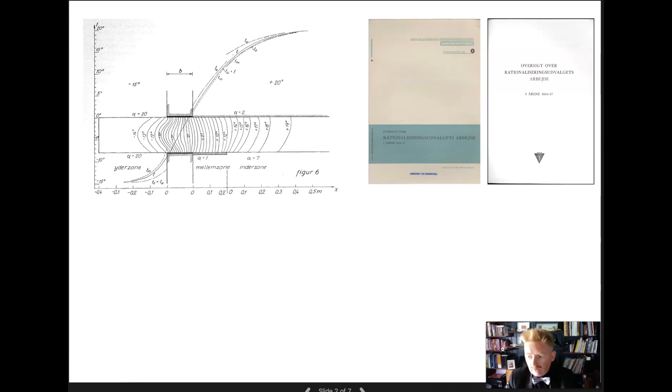They had identified the risk of condensation, particularly with continuous concrete intermediate floor slabs. They also identified that modern, tighter concrete constructions were aggravating the risk of condensation at cold bridges.

The report indicates that there was a working knowledge of cold bridging as part of the Scandinavian construction industry prior to the 1950s. Yet it was probably the language that became a barrier to the broader dissemination of this knowledge around Europe. Prior to the Second World War, human health was a concern of the modernists in particular.

We know that Walter Gropius and Maxwell Fry had been arguing that clean modernist buildings improve the living conditions of the people in their Impington project in 1936 in the UK.

Pierre Winter, a doctor and neighbour of Corbusier's in Paris, gave a lecture at CIAM 5 in 1937, arguing for a close collaboration between doctors and architects to reduce diseases to a strict minimum. So it was an issue at the time.

We also know that Corbusier had understood the importance of aspect and sun path before designing and completing Unité d'Habitation in Marseille in 1952. Many of the young architects in London County Council in 1950 would be heavily influenced by Corbusier's Béton Brut of Unité d'Habitation.

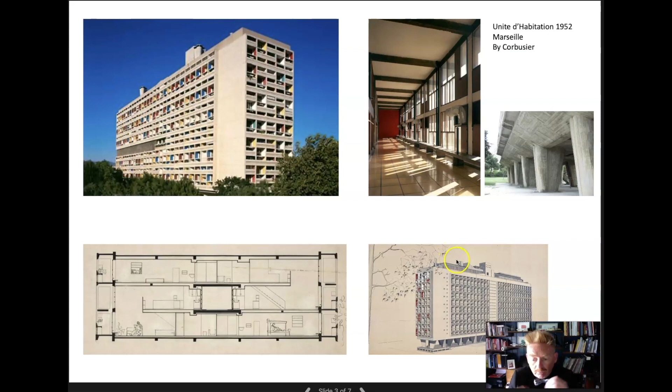In 1953, the LCC London County Council architects completed Winchfield House, which was heavily influenced by Corbusier and Unité d'Habitation. In fact, it was James Stirling, who worked with LCC at the time, who attributed the concept of Winchfield House to Corb's much earlier and conceptual Tower in the Park.

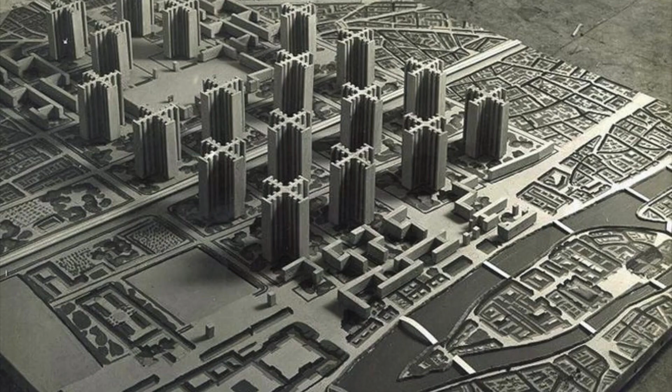Such building designs would not benefit from the understanding of thermal bridging. In fact, it was Marmot in 1978 who argued that Corbusier carried through on a much higher quality in Unité d'Habitation than LCC did in Winchfield House, where they compromised on so many of the key features of Unité d'Habitation which would have benefited the occupiers.

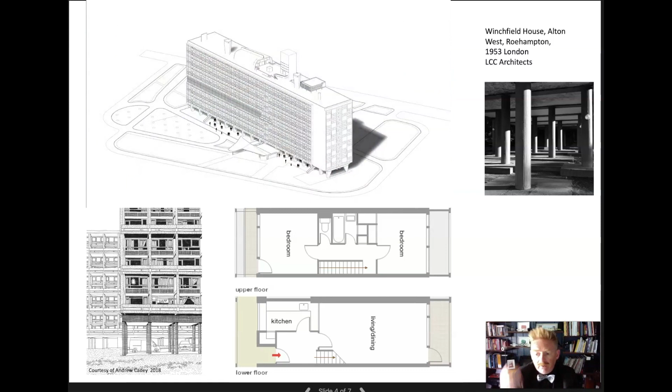Unlike Marseille, London would have a higher risk of condensation with much lower winter temperatures, little in the way of insulation in the buildings.

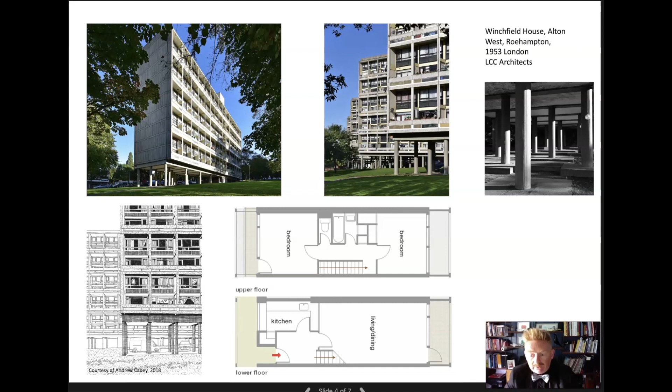So as we moved through the 1950s and 1960s, would British architecture, who were continuing to provide mass housing, learn from these experiences and gain better understanding of the environmental consequences? As early as 1963, Brown and Wilson, writing in the Canadian Building Digest, warned that linear thermal bridges could cause condensation and structural damage, particularly in freeze-thaw conditions, which could be readily overcome with insulation placed over the entire exterior of the building. What a radical idea. They highlighted the impact of lateral heat movement in non-continuous constructions such as timber frame, which were popular in Canada and the US at the time.

So as the consequences of thermal bridging became more mainstream in the 1960s, would architects and developers of housing and apartments change the way they designed and built them?

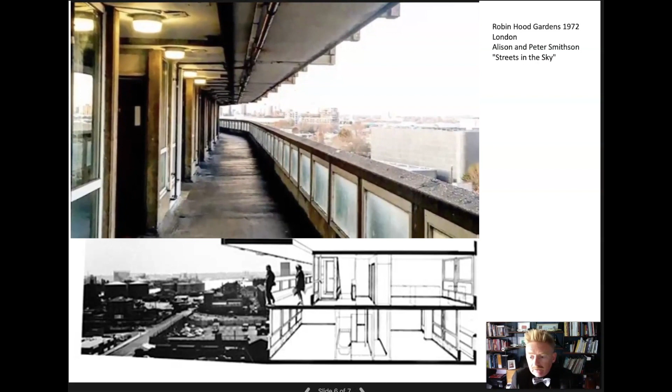Despite the many social and environmental performance failures of the LCC apartment tower buildings through the 1950s and 1960s, Alison and Peter Smithson would complete another homage to Corbusier nearly 20 years after Winchfield House, in 1972, at Robin Hood Gardens. The Smithsons, who we know were environmentally aware — and I would argue there was perhaps an excuse in the 1950s for a lack of knowledge of linear thermal bridging — but was there an excuse in 1972?

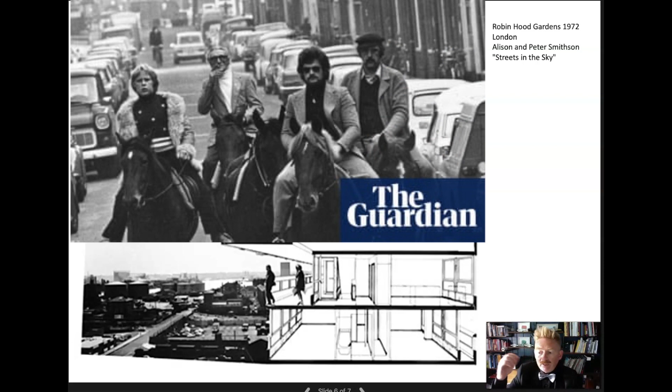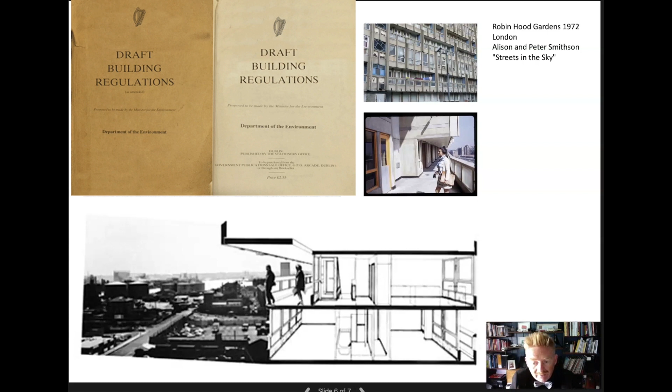Realistically, without insulation and with the use of single glazing, thermal bridging must have seemed of little concern in terms of energy loss. In fact, it would be the oil crises of 1973 and 1979 which would bring governments, policy, standards, developers, architects, building owners and occupiers to a concern for building energy conservation, and only then would issues like thermal bridging start to get a fair hearing.

Although they are all linked — Chernobyl, the Kyoto Protocol — it would be the Energy Performance in Buildings Directive in 2002 that drew our focus into building energy, and we became more concerned about insulation and thereafter thermal bridges in relation to heat loss. So thank you very much for your time today, and I hope this gives you a little bit of historical context to the background of our topic today.

Thanks very much, Mark. That was, as ever for me, fascinating historical context, just like with your columns in the magazine. It's a sickening feeling to realize how much this knowledge has been within our grasp for so long, and it really gives us even less excuse for our failure to act.

Anyway, I'm going to move on to our next speaker now, and I hope all of the attendees are enjoying the Pechakucha, or Pachakacha depending on who you're speaking to, format for these presentations. It's a difficult ask, I know, because when you're dealing with something as technical as thermal bridging you invariably have to go into the realms of PowerPoint. So of course this won't be as seamless as the kind of Pachakacha presentations you'd find of people showing what they've had for dinner — there's more substance hopefully in this, more nutrition actually.

Okay, so this is a thermal bridge, and you can see we've modeled it to look at the heat loss, but that's not what I'm really worried about. I find thermal bridges are actually a symptom of deeper issues. So this is what I'm going to look at here, and I'm talking about new build, not retrofit, which is a different challenge, as you'll hear later.

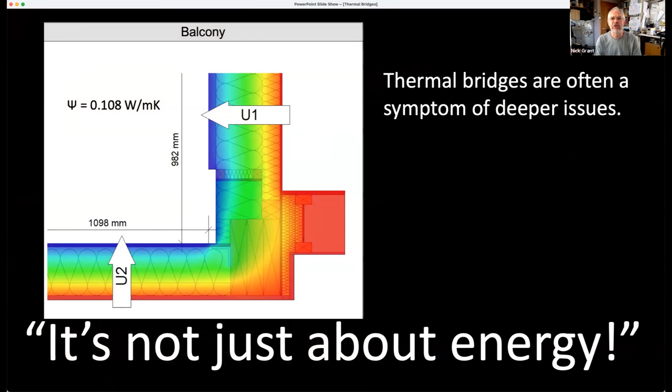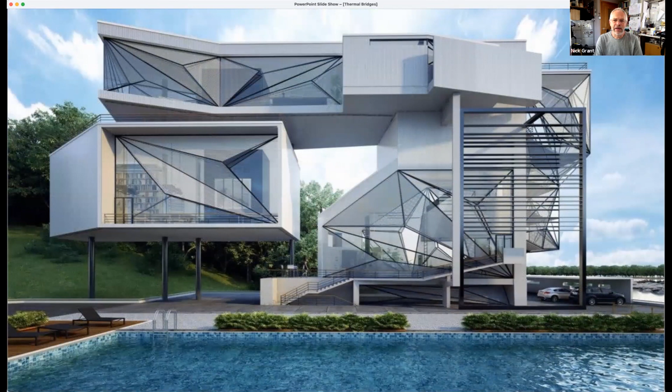You can have some fun Googling cantilevered housing. Extreme architectural expression, clearly lots of challenges here. But is this what we really want to be doing? Are we looking for solutions to this problem?

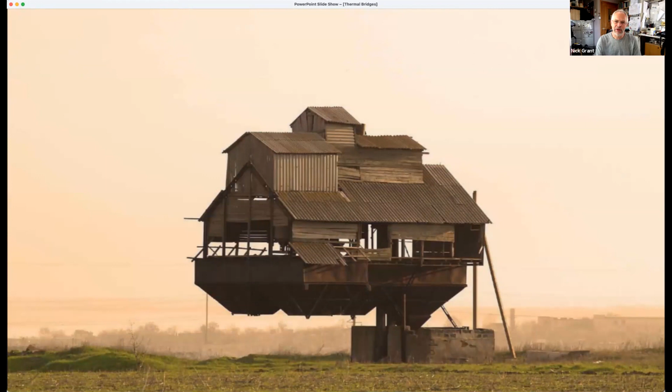This is an interesting example, clearly very interesting, I think it's very beautiful. It's a potato sorting station in Ukraine. Again, no thermal bridges, but it's definitely cantilevered, and it looks structurally challenging. But there's a real rational reason for that layout: if you're going to drive potato lorries underneath it and you don't want any columns to bump into, then this is really a good solution.

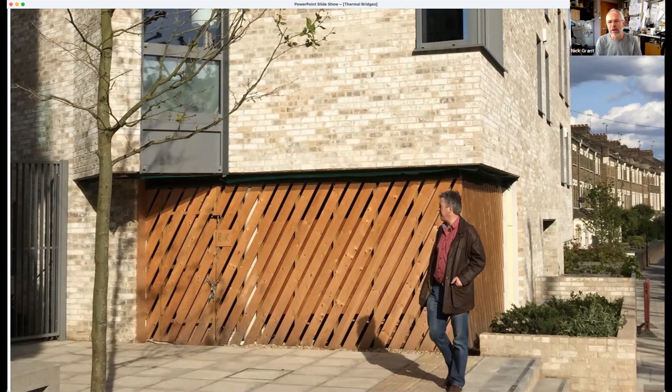So here we've got Camden again. This is a passive house, Chester Balmore, less extreme than that example, but we've still got some fairly challenging structure. We've got the brick starting at first floor in places, corner windows. So how do we hold this brickwork up?

The way we do that, of course, is with hidden steel bracketry, which you can't see here - steel angle sections, we see a few under the soffit here. And these have to be thermally broken because they connect the external brickwork to the inner warm structure. That's expensive, it's difficult. And how do you finish this off underneath? How do you finish the soffit? How do we insulate around these? So lots of technical challenges and things that are quite hard to make look good.

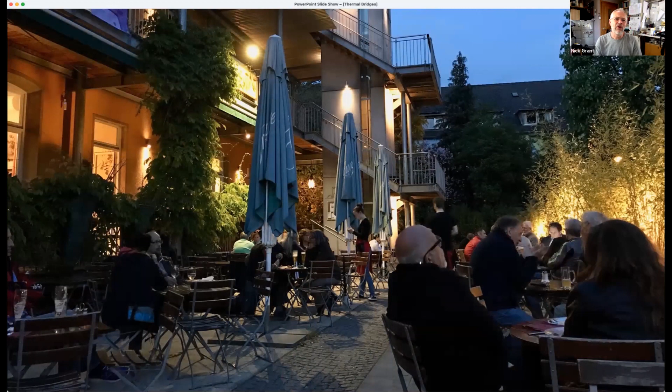In Freiburg, so here we've got - you can hardly see it in the background - there's just these nice balcony details. It's galvanized steel, it's all pretty industrial and pretty basic, but the overall effect is really lovely. We've got nice plantings, there's nice furniture, a really nice vibe in the cafe here. Just the overall effect's very good.

Slightly more complicated again in Freiburg. Here the balconies cantilever out a bit further to give a bit more space and a bit of change in expression, but quite simple to do because it's beyond the thermal envelope again. So although they're cantilevering beyond the posts, this is all outside the envelope, so it's not really that challenging. And again, very generous spaces, looks really nice.

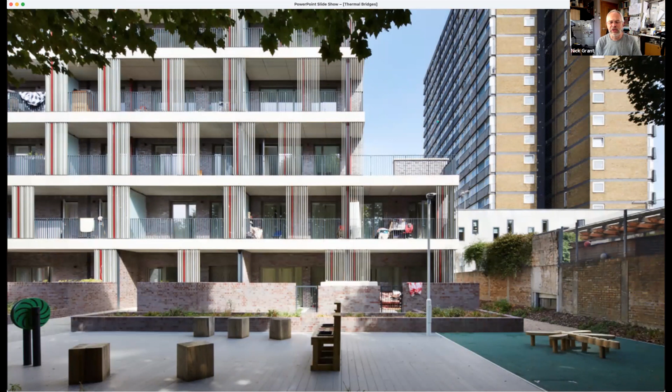Agar Grove in Camden again, so this followed on from Chester Balmore. The balconies here are supported, as in Freiburg, on external structure.

So this could be a development anywhere. This is some housing in Gloucester. Classic thing of lightweight cladding, external insulation, and then fixed back to either masonry or steel structure. And here we can't avoid the thermal bridging. We need something to connect the two together, which goes through the insulation. And the usual solution is aluminium brackets, which hemorrhage heat. And the thermally broken ones are expensive.

Here, Monte Paulsen in Canada has just used stainless steel screws, difficult to prove structurally, so they actually mocked it up and tested it out. So it's a nice simple solution to a challenging problem.

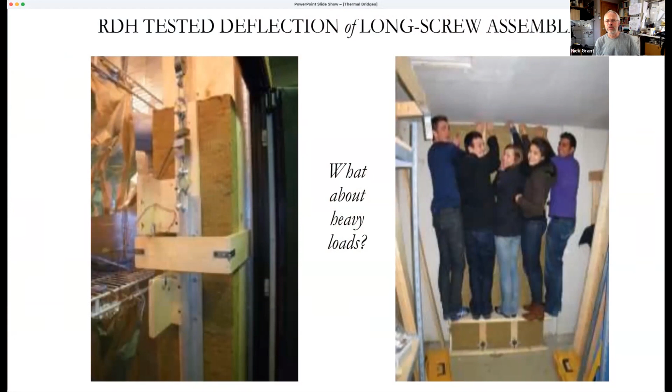So in summary, if possible, design out thermal bridges. Don't create structurally challenging situations like cantilever balconies and so on. Try and design these out because that'll create savings. It'll potentially even look more beautiful. And where it's unavoidable, so where we've got to connect to the ground with foundations, or if we're wanting to hang lightweight facades off the structure, then we do need some thermally broken connectors.

But what we need here is low-cost, simple connectors that everyone can use, not just for passive house projects. We need everything you can get from the builder's merchant to be thermally broken, so we're not wasting energy and creating potential mold and moisture problems, as other speakers will talk about.

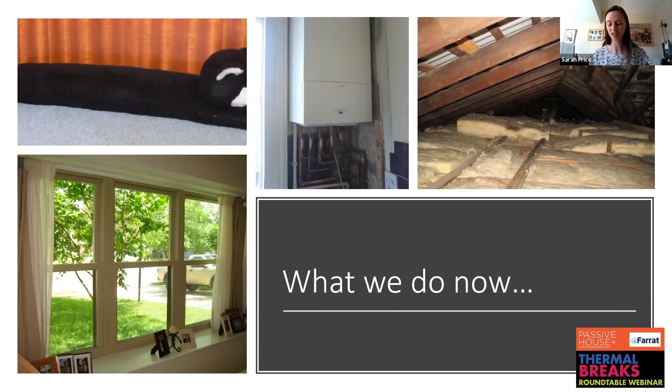So a bit of context, what we do now is we might install loft insulation, a boiler, new windows, but there's no joined up thinking. We do step-by-step retrofits, but there's no design, there's no planning. We don't think about the junctions, the corners and the edges, and we don't think about how the insulation's impacting on heating and ventilation. So we end up with unintended consequences like this one.

And that's not just mold growth. There's loads of unintended consequences like increased energy bills or fire or poor indoor air quality or degradation of the structure. This is just one of them, a lot of them related to moisture.

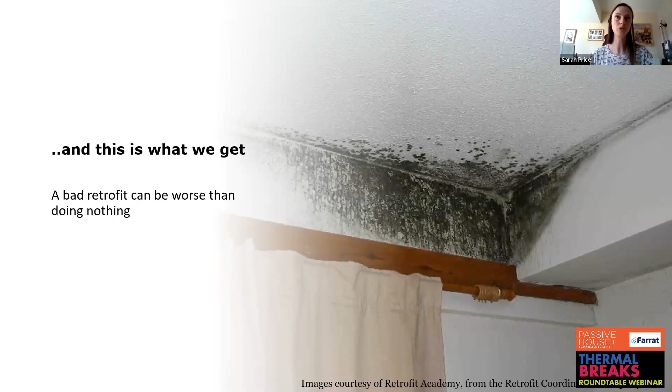Can we have a thermal bridge free retrofit, or is it an oxymoron? Well, if we say thermal bridging is continuous insulation all the way around a building, then no, we can't, but we can mitigate against them. And there's two main issues with thermal bridges: mold growth and heat loss.

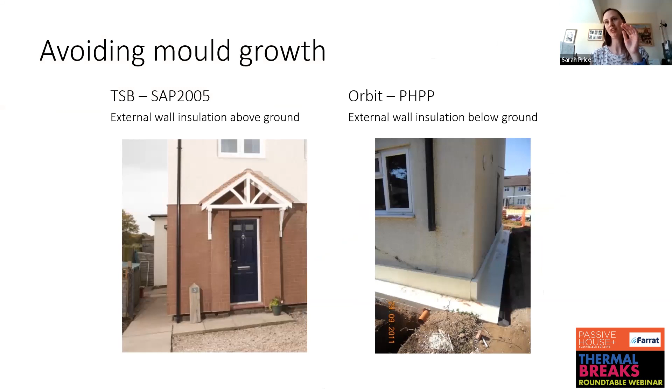So here's an example of external wall insulation. On the left-hand side, we've got the external wall insulation finishing just above the ground level. So both these properties have got solid floors in them. On the right-hand side, this is an Enhabit one, and we've got external wall insulation extending down below ground level. So it's just the foundation that's in there.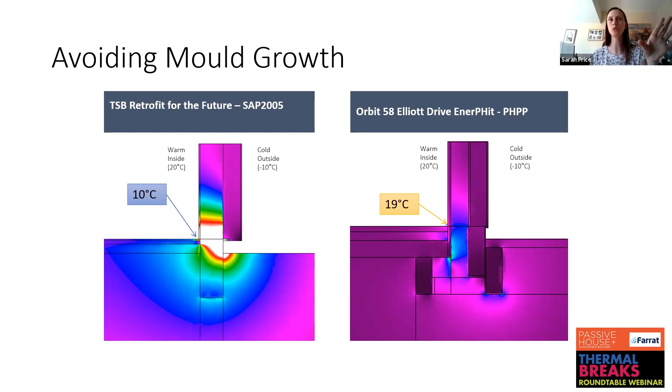And then these are building physics models of those thermal bridges. And we can see the internal surface temperature that might occur at different internal and external temperatures. And you can see the one where the insulation doesn't come down as far on the left is a much colder internal surface temperature than the one on the right.

But I've got thermal bridges. We've all got thermal bridges, and some are fine, like my wall to floor junction, and some are not fine. Some are mouldy, like in my bay window here. So I've got nice black mold growth that I have to clean off every year. So why is that? It's not as straightforward as if you've got a thermal bridge, you get mold growth. We need to manage the risks.

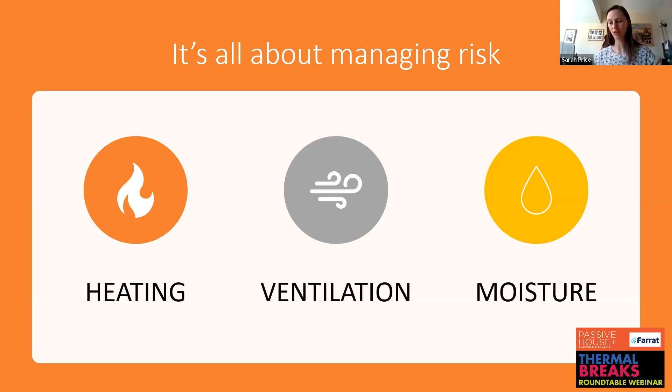So we need to make sure that the space is heated well. We need to make sure that it's ventilated well and into the corners. That's the really difficult bit. We've got to try and control moisture. So through cooking, washing, bathing, we've got to make sure that we remove that excess moisture from the home.

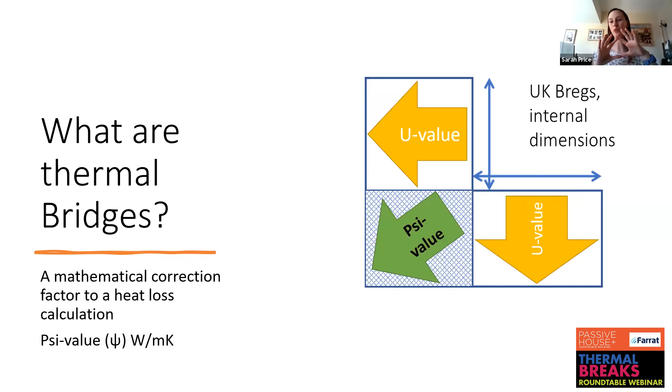There's another definition of thermal bridges, not just continuous insulation or discontinuous insulation as the case might be, but it's actually a mathematical correction factor for a heat loss calculation. So we have U values that deal with the plane elements, and we have psi values that deal with the corners. And they come in all shapes and sizes, good, bad, and ugly.

So we can have good thermal bridges that actually make the heat loss better, because you basically said that that corner is not providing excess heat loss. We can have bad thermal bridges, most of them are, that mean that we do get more heat loss. And then we have ugly ones as well. So how much heat can a thermal bridge lose?

Well, we've got this situation where we're going to keep the windows in the concrete layer, big psi value, 0.5 watts per meter Kelvin. If we move the windows out into the insulation layer, we have installed it there, we get a really tiny psi value. But what does that actually mean?

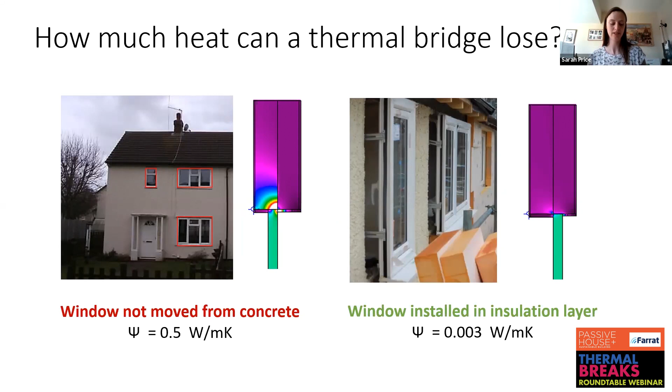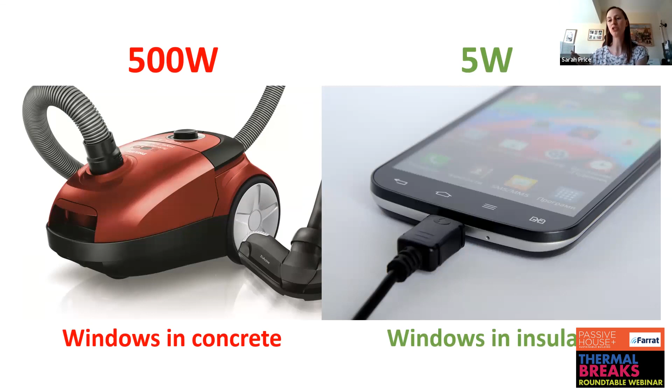Well, if we leave the windows in the concrete, that's equivalent to 500 watts of heat loss, or having a Hoover on all the time in the winter. If you keep them in the insulation or move them to the insulation layer, it's the same as charging a smartphone. So 5 watts, much smaller heat loss.

Cladding fixings, Nick talked about cladding fixings. So I have a bee in my bonnet about cladding fixings. So this is an aluminium fixing. It increases the heat loss in the insulation by 92%. And these calculations were done by Greengauge. They're 3D thermal bridge calculations. And they worked out how many of these cladding fixings we needed.

If we take a bit of foam glass, so that's a structural insulating block, 50 mil of it, put that between the wall and the fixing, we still increase heat loss by 42%. So huge amount of heat loss. What we really need to do is have a look at the material that it's made out of. So this cladding fixing is made of pultruded GRP, or fiberglass, as you might know it. And it increases the heat loss by only 8%. So it's exactly the same size and shape, but it's made of a different material. So it's all about the materials here.

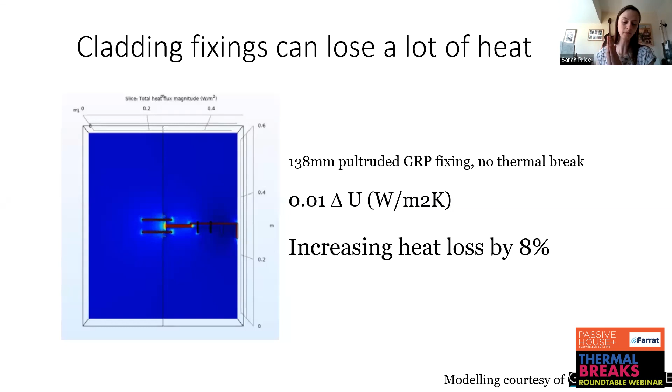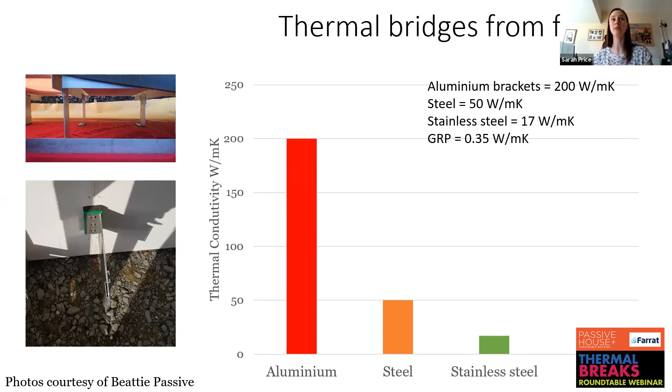If we take something like aluminium, it's got a massive thermal conductivity, which means it loves transferring heat. So 200 watts per meter Kelvin. Steel, bit better, 50, stainless steel at 17, but GRP 0.35. And our insulator materials are about 0.03. You can see on the left here, it looks like aluminium actually, but it's a lot better performing.

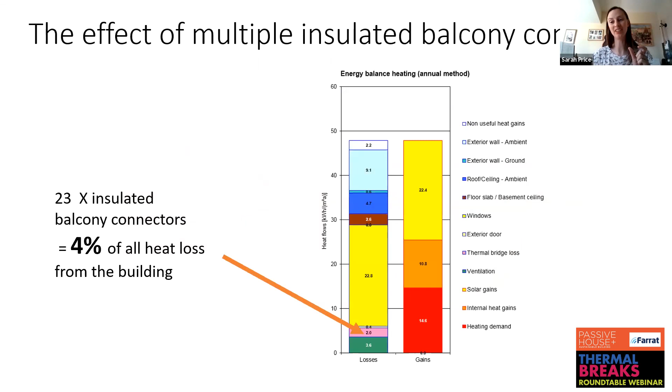If you've got a decent amount of insulation in there, you put one of those in, it's still a thermal bridge. And this project has got 23 balcony connectors in it, and that makes 4% of all the heat loss from the building. So it's still quite significant. They add up very, very quickly if you look at the heat losses.

So in summary, manage the risks of your thermal bridges, remove the moisture, get your ventilation right, make sure your buildings are heated well, understand the heat losses. So how much is it actually going to cost you? Are you going for certification? Does it really matter? And lastly, don't use metal. Think about the materials that you're going to be using. And that's me done.

Thanks very much, Sarah. That was very interesting, and you found a way to put some quite technical subject matter across in terms that at least I could understand, so I think everyone else's chances must be good. What we're going to do now is open it up for a panel discussion. We're in the region of about 20 minutes or so.

The top one, which I guess we'll deal with, is what is the best way to thermally break a window that is fixed back to SFS, I presume that's a steel frame structure, and sealed around the frame to metal angles at the sill and head? Don't do it. Try and avoid using steel angles for a start. But if you have to use steel angles, you could put something like Compacfoam between, which is a structural insulating material between the steel angle and the window frame.

In a retrofit situation, we use a timber bearer underneath, simple solution, steel straps going back at points, which are very small thermal bridges, and so therefore you're reducing the heat loss.

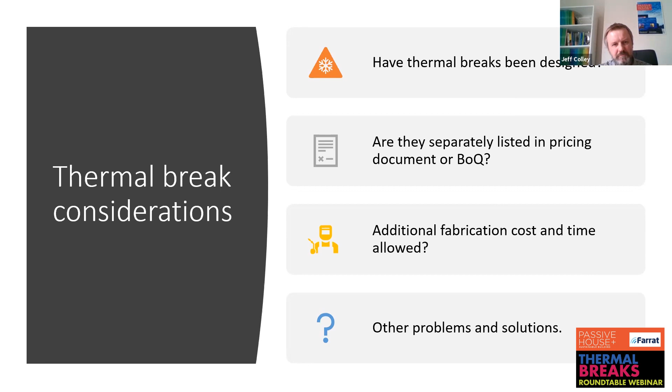And my job is mainly to improve the project's design as early as possible before we move ahead with the construction. And today I want to talk about thermal breaks and a few considerations, like, have thermal breaks been designed on the project? Have they been included in the costing documentation? Are they causing us additional costs, and not only costs for fabrication, but also lost time? And do we have other problems or solutions? So we want to talk about a few examples.

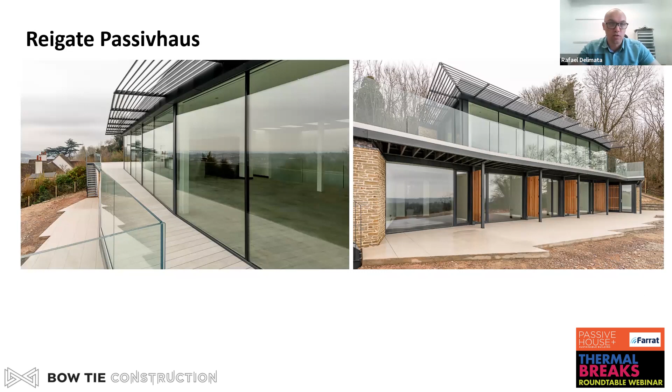So it's a Revit coordination between our steel supplier, Stilo, which produces IFC files, and also Contrasol, which is a supplier of the brise-soleils. What we're basically trying to show is that the thermal break issue, which we had, was extremely complicated to coordinate between various parties. And the lesson from this was that we're trying now to avoid situations in which we have two contractors divided by a thermal break.

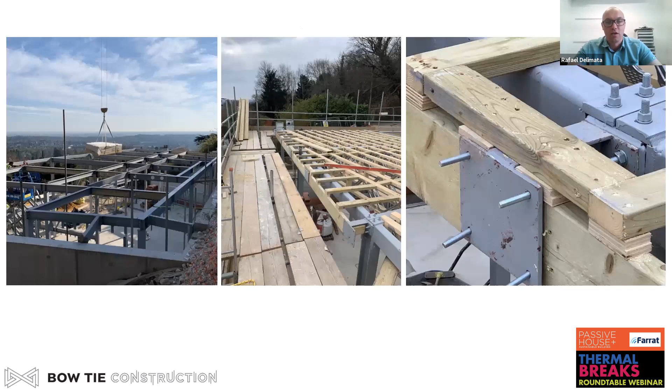We heavily underestimated the amount of time that we required to coordinate both subcontractors, and the steel frame was constructed from the 3D model, but all the columns, which you can see in the left-hand side photograph, were positioned using a total station and a professional surveying engineer. And after the steel structure was assembled, we carried out further checks, again, to make sure that the thermal breaks are in the right positions.

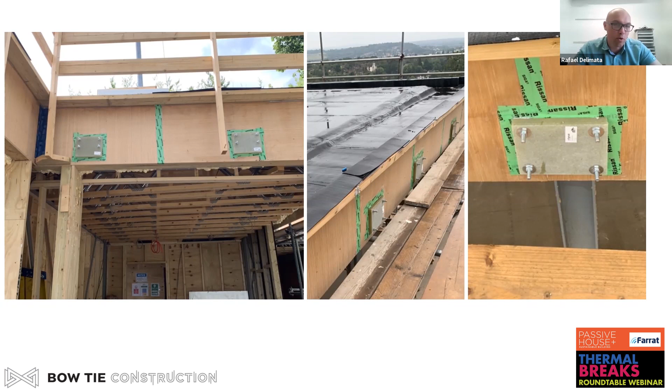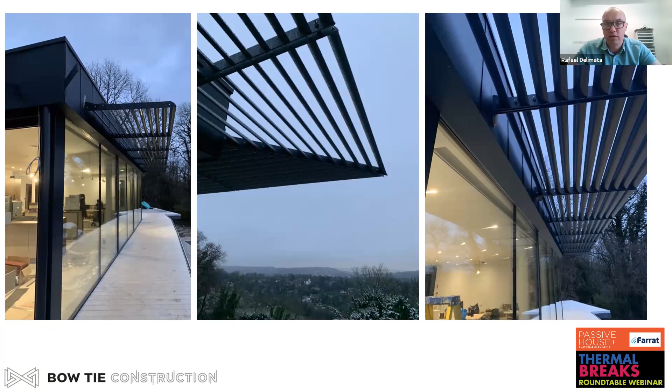We used Farrat thermal breaks here. It's a simple sandwich, and an airtightness tape was used between steel plates and plywood structure, with airtight silicone around all the bolts. So that was ready for the specialist contractor Contrasol to come in and fit the brackets. You can see the arms sticking out on the left-hand side, and then further fins being added on. This was followed by installation of the zinc cladding all the way around the building. And it was very successful. We completed the coordination, including very random angles on this brise-soleil system.

And I think a few things now to summarize from this project. Because we're working on an essentially thermal bridge-free passive house, but those elements have not been designed out. And even though we had separate pricing in a document, it wasn't enough. And did we allow additional costs and time for all this work? The answer was no, we didn't. And a further complication was that we had to position thermal breaks in consideration of airtightness, and also the size of thermal breaks changed due to the shading wind loads.

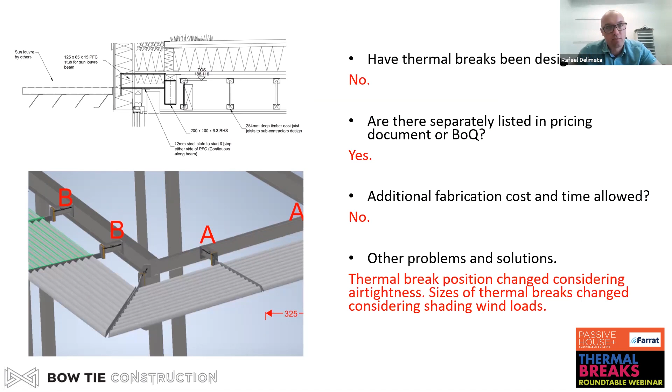So the next project is a Putney EnerPHit project, quite a simple build. Again, externally insulated from outside, 200 mil of insulation wrapping the whole building, so there weren't too many thermal breaks. But we had 3D modelled all the steel connections as per structural engineer specifications and our site survey. We then asked the steel supplier to add our standard thermal break sandwich. So this is something we're just using now as a standard.

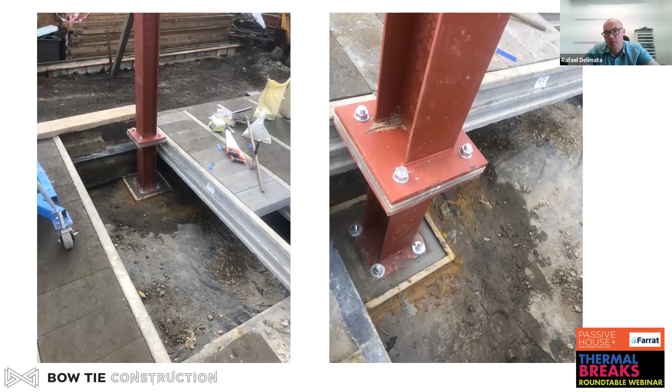It's 2 pieces of 300 by 300 by 10 mil plates with 4 number of M16 bolts and 25 mil Farrat TBK thermal break in between. And that's when we haven't got a design ready by engineer or architect, we simply put that in and we know it will work. We then follow this with the structural engineer and double check everything.

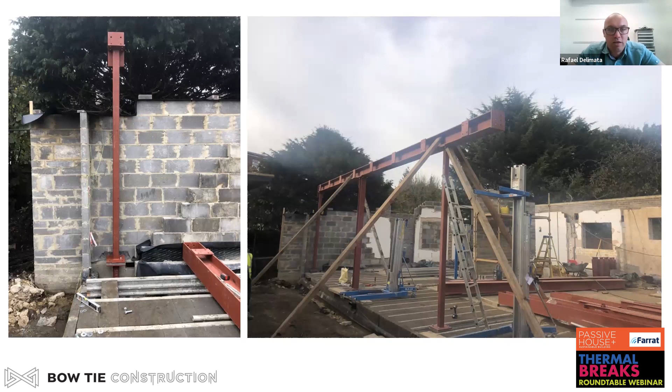And then the thermal break will only be used on this project for the columns. So all the other walls will be externally cladded, so we don't need any thermal breaks. And the project was delayed by 1 week because of the delay on coordination of those plates. So have we had the thermal breaks designed? No, and there was a separate price, which was good. And I think this was correctly costed, but no extra time was allowed for the fact that the thermal breaks have to be made to measure.

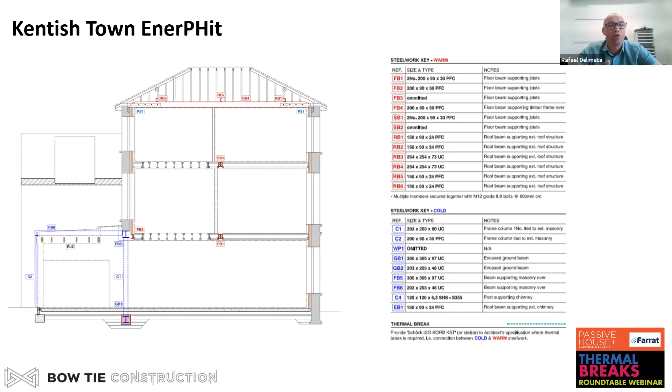And then our next is a Kentish Town EnerPHit project, which required complete internal demolition. So very deep retrofit. New internal timber structure was built and it was connected with the old shell of the building. On that project, we worked with Bob Johnson, the structural engineer, who was fully aware of thermal bridging, which was very great news for us. We really like his approach and hope for more engineers to adopt this simple technique where the cold steel is marked blue, the hot steel is marked red.

So when the question is, do we have the thermal breaks designed? Yes, and this was one of the very few projects that was properly done. Did we have that costed in? Yes, and it was properly costed. There was no additional cost later on, no delays, all went very smooth. And the color coding also helped laborers on site understanding which parts of the steel structure have to be additionally insulated.

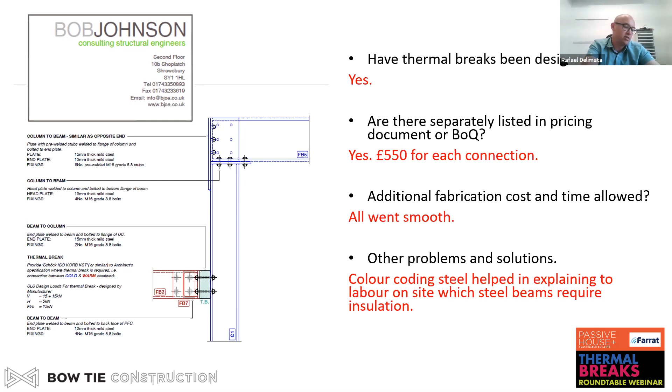And I apologize if this was an extremely practical approach, concentrating purely on steel connections. But I thought if I give you some realistic examples, dive into one detail, we're not going to be talking only about very vague ideas of the thermal break.

I think it's very useful, Rafael. I mean, even that takeaway of the color coding, it's analogous to the way that, you know, it's become quite common to have the airtight layer drawn in red on the plans. So that there's just more visual recognition of what it is. So I think that's a great takeaway.

So next up, this is Professor Will Swan, the Director of Energy House Laboratories at the University of Salford, where he leads the Buildings and Energy Research and Innovation team. He's currently leading the development of the £16 million Energy House 2.0 project, a major building performance research facility. He's also chair of the Greater Manchester Combined Authority Low Carbon Buildings Challenge Group and a member of the Mayoral Retrofit Task Force.

And Joe Pemberton, who's sharing this presentation with him, studied mechanical engineering, finding aptitudes in heat transfer and fluid mechanics before taking up an Industrial Cooperative Awards in Science and Technology PhD to further his studies into heat transfer, applying the physics to real industrial applications. Jointly working with Farrat and Energy House Laboratories at the University of Salford, the work focuses on the design of an experiment to quantify thermal bridging and structural breaks with modelling and in situ measurements.

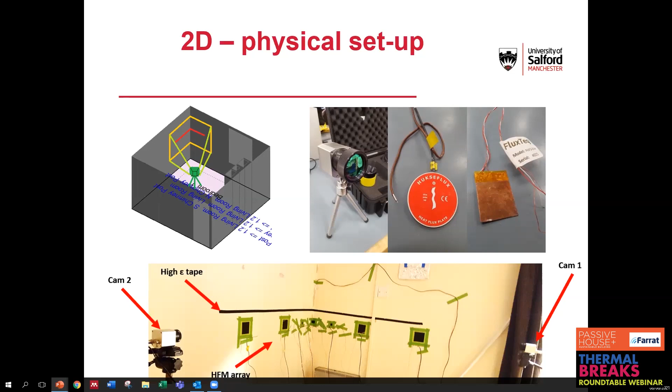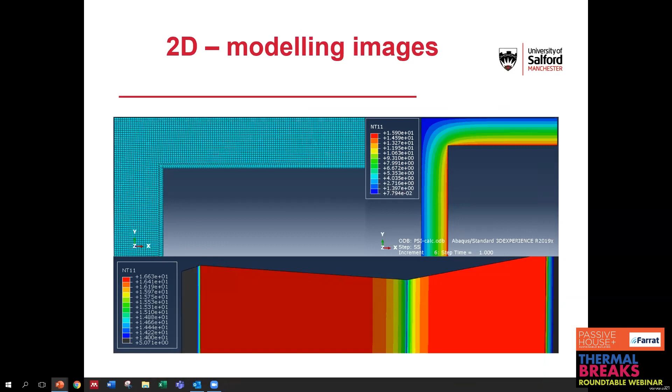I took measurements from this investigative detail to calibrate a thermal model, trying to validate the model calibration technique for the experimental design. Surface resistances were set at standardized values, and we found that the actual surface resistance values you set are quite sensitive. So the standardized versions of the surface resistance were taken forward to the next experiment and measured.

Now, this is how we calculated the incident factor, which I did with the heat flux meter and the infrared. I converted them to psi values and compared them to the finite element simulation, and found really good agreement. So this was then carried on into the next experiment where we could really look into the 3D heat flows.

This 3D experiment was a preliminary one. It's a little bit like a Juliet balcony, as we've seen before, but we had to modify the Energy House to produce this balcony and this thermal bridge, because there were no 3D bridges of this sort where we could test thermal breaks. We realized this by putting a steel cantilever beam on. We had to make a soft sand cement mix to try and achieve perfect thermal contact, because the brick surface was quite rough.

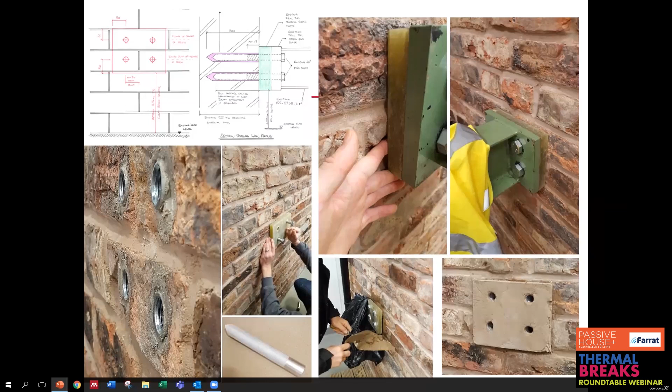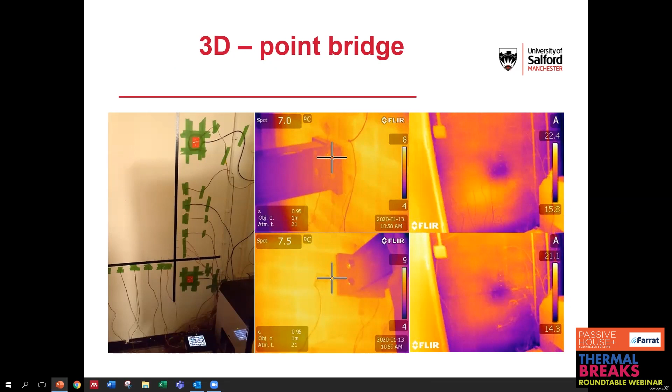You can see preliminary infrared imaging on the right hand side there shows a cold spot on the internal face, and the sensor array on the left hand side is what I used to tune the model to try and calibrate it.

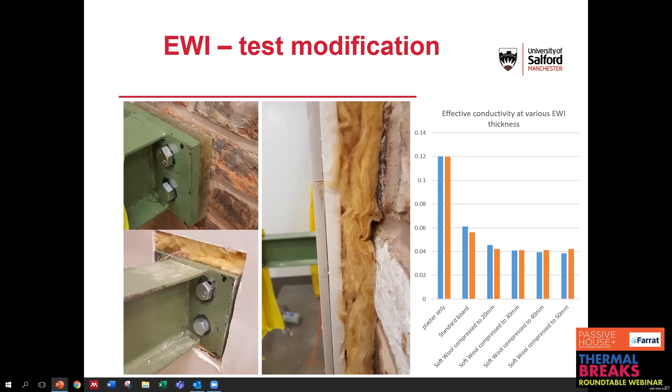So I had to try and modify the test. What I did is I retrofitted external wall insulation around the thermal bridge to try and exacerbate the thermal bridge effect. Now, I didn't know what thickness this external wall insulation would be because it's comprised of soft wool, so I didn't know what thickness it was going to be when retrofitted to the wall. So I used the heat flow meter to compress it at different thicknesses and found an effective conductivity at each thickness, so when it was retrofitted I could just interpolate the actual effective conductivity and input that into the model, which is what I did here.

So this wasn't exactly what we wanted to do. In lieu of trying to find a real balcony to test, which was the true goal, COVID hit. So we decided to try and make our own sort of hot box. There's a cheap solution and an expensive solution: the cheap being 2 sheds put together, and the expensive version being a container which would be insulated to the nines, and then I'll be able to put up my specimen between the hot and cold side and test it.

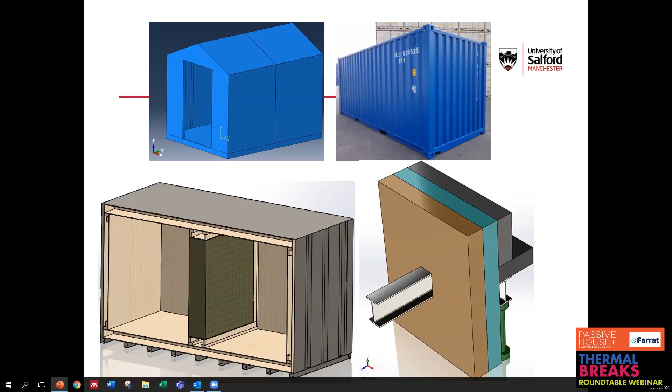Now, the budget was cut short and the energy house came to the saving again, and they let me remove a window from the upstairs conditioning void, which is the neighbor to the actual energy house itself, so I could put my specimen in the wall.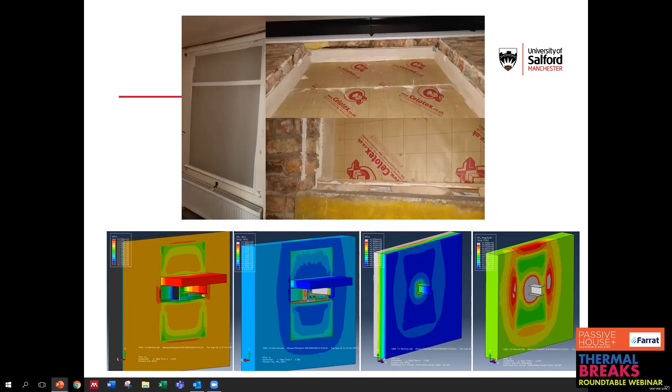Now, we cut a hole in this wall after a baseline test to put the steel through. The steel was then put in. We bolted the steel up so it was easy enough for me to change the thermal break variants from the external side. And we're going to test 6 variants, 3 materials and 2 thicknesses of each, 5 mil and 25 mil, and they're all Farrat breaks.

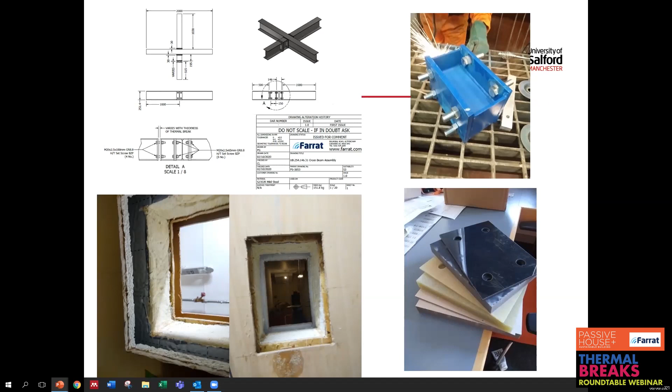So this is what it looks like at the minute, and this is where we're gathering data from. The steel beams being propped up on Acrow props, which are anchored to the wall and the floor, because I didn't realize how heavy this beam would be. So yeah, that took me by surprise a little bit. But this enables us to really look at what the breaks are doing.

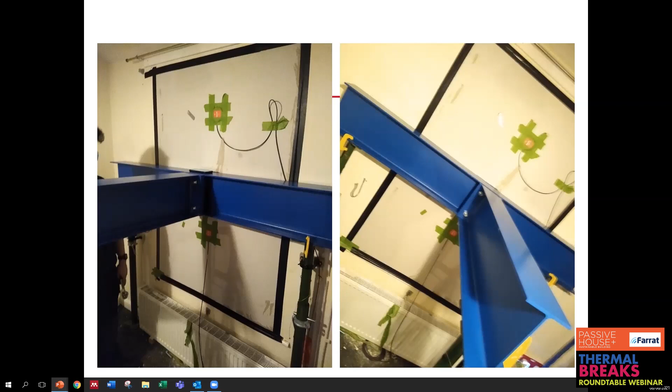Aside from this, we are looking at using a real case study, but unfortunately we won't be able to get any heat through the actual embedded breaks that are put into this Energy House 2 construction until February next year. So this is future work, but it allows us to actually monitor a real live case study of where these structural thermal breaks go by embedding sensors and tuning the models, again just trying to reduce the performance gaps between the as-built and the predicted energy performance.

So I'll let Will finish up with where we're going in the future.

So I think this is quite interesting for us, really, because I suppose we see it as very much at regional policy level.

So what's going on in terms of what is going to be demanded by local authorities, city regions, with them all heading towards 2038, 2030, 2040 for zero carbon.

I think we're seeing less quick wins, so we're having to look at the detail a lot more. It's not just running around filling in cavities and putting loft insulation in. We need to start thinking a bit more heavily about the design from top to bottom, which Passive House helps us do. I think we're going to see a lot more measurement as sensors and comms come down in cost. People will want to see what things are actually doing, and what things are actually doing is more important than how we've modeled them.

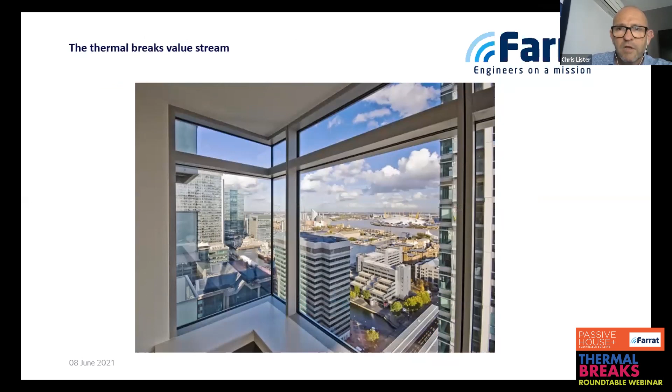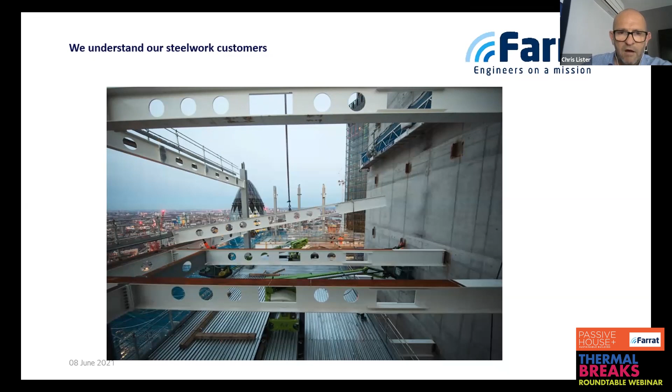We see a lot of concrete work going on, but a lot of what we do is structural. The primary people we deal with are our steelwork customers, so we spend a lot of time understanding what their world is, how they work, what they need from us, and making sure that we are answering all the questions that they put to us.

We understand our specifying customers. They're a mixed bunch, and depending on who you come up against, they have some great ideas. We're quite happy to work with everyone and figure those out. We also understand that some of the things are unworkable, and really we should be able to, quite hand on heart, tell people that isn't the case.

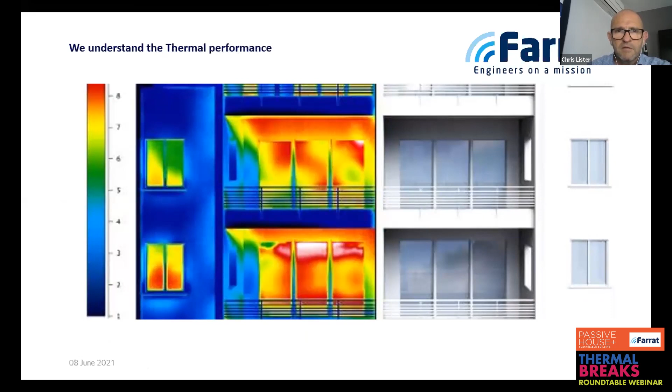We understand thermal performance. This is one of the cornerstones of what we do at Farrat. The work that we've just seen from Joe and from Will is that we want to understand to the deepest level what we do for thermal performance, because that is core to what we do.

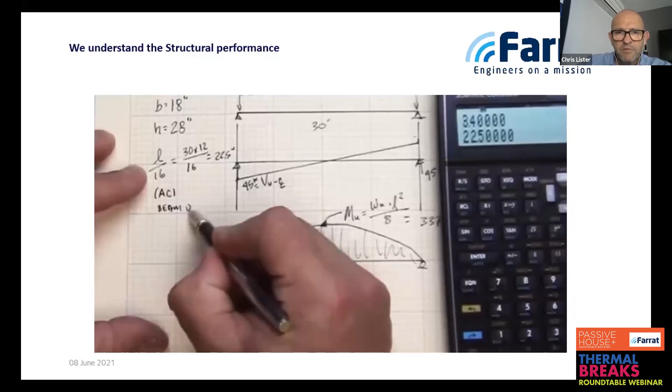We also understand structural performance. We are engineers at heart, and we are trying to make sure that everything that we do stands up. So we have this ability to think both from a thermal point of view of the construction, the building envelope, with the architects, and also with the structural engineers.

And we understand it's a balancing act. We know that if something has got to stand up and it's made of steel, it's probably not very good at being an insulation. And equally, we understand that if you've got something fantastic at insulating, it's probably not going to have structural performance to it. And that is where we sit.

And that way we understand the compromise. We know that sometimes you can't do everything that you want, but we also understand that it doesn't have to be a total compromise in terms of the aesthetic form of the building. And we understand that there are ways of making sure that those compromises don't define your building.

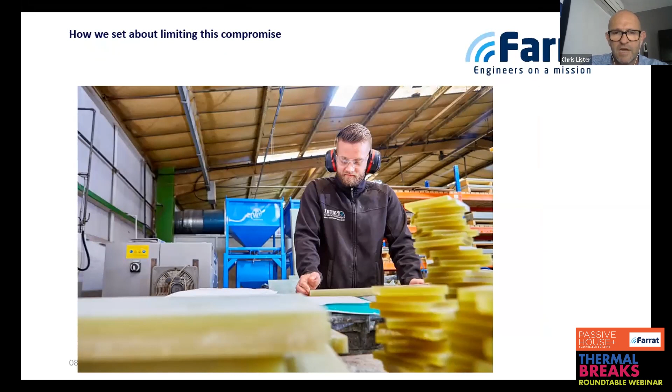So we spend a lot of time working solutions. We make products. We understand the role that we have in making something that is both affordable and capable of going into a building and not being missed and put in a skip and all these other things that happens on site. And that really comes from our detailed understanding of those elements.

So the structure, you know, how these things go together, how something is going to be built, the sequence in which it's going to be built, you know, the materials that can be readily available on site and everything else that's going to go with it. That is one part of what we have to do.

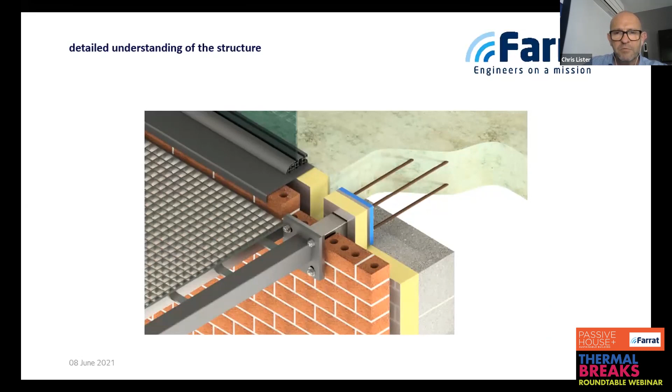And then understanding the ultimate thermal requirements of that building, the comfort factors that have to go into it, the fact that you do not want to see a big black line of mold on your brand new penthouse. These are things that we understand, and therefore we're able to make informed decisions and make them into reality in terms of products. And this is not just something that has come about since, as we said, potentially 2002. We've been doing this for years. We're a third generation company.

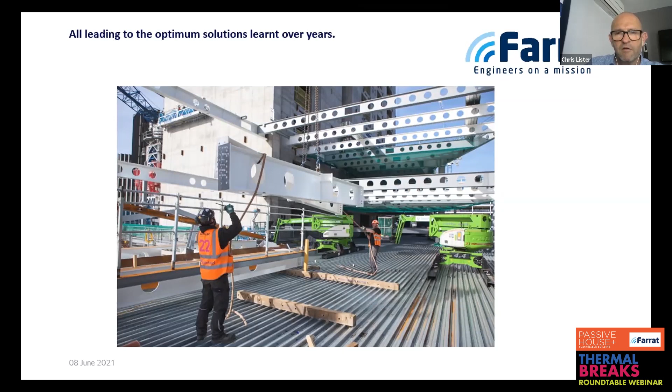We have industrial engineering at our heart, and that comes through in everything that we do, whether that be building acoustics or thermal. So we have got to a stage where we understand optimum solutions. We are understanding that we are a key part of that design process. As I say, if you get us in early, we can give you a good feel for what will and what won't work based on our experience, same way as has been seen in the real world, and then being able to really give answers that are trusted.

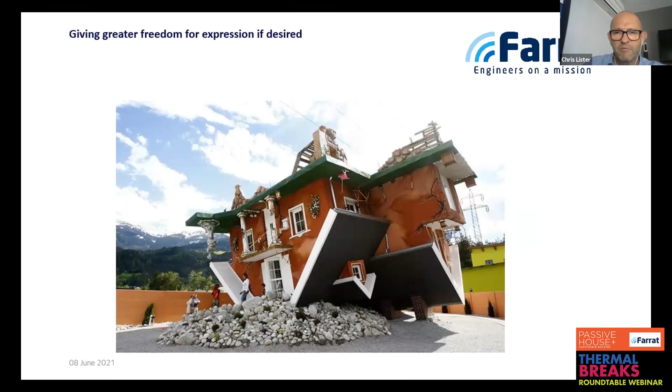So we have these exemplar performance levels that we know we can achieve, and we have all the backing of all those industry groups to be able to say, look, we know what we're talking about, and we'll tell you if we don't think it works. If you want to do something that you think will work, we'll happily go along with you, and we'll happily help you achieve your goal. But in truth, we'll also tell you when we don't think that's a very good idea, and maybe you should look at a different way of doing it. It comes back to this idea that you are doing something safe in the knowledge it will work.

We work in structures. Our products have to last the lifetime of the building. You need to make sure that when it goes in once it doesn't have to go in again, and that it will work, because you don't get a second chance on some of these hidden structures. And that's the reality of these structural elements. So ultimately, we get to build buildings that we love to see. We push the building envelope, and from a Farrat point of view, we get to fulfill our mission statement, which is really delighting our customers. And that is really what we're all about at Farrat, making sure that we delight.